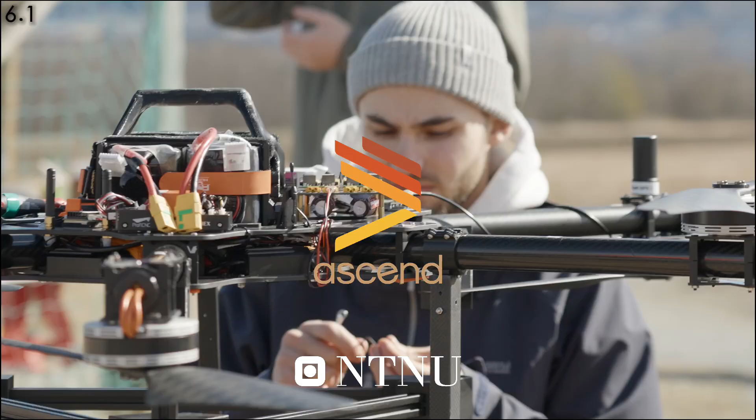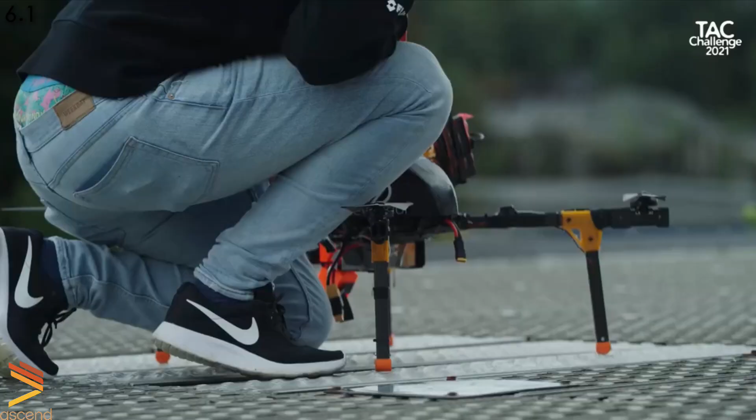We are Ascend NTNU from the Norwegian University of Science and Technology, and since being founded in 2015 we have developed autonomous drone platforms for multiple international competitions. With a proven track record of innovation and dedication, we're now setting our sights on the SUAS competition of 2024.

This year's development team consists of 4 technical groups: hardware, perception, autonomy, and control, 2 non-technical groups, marketing and business, and a board that organizes the whole organization. Our competition team consists of a team captain, safety pilot, backup safety pilot, ground control station operator, backup ground control station operator, and hardware, perception, and autonomy specialists.

Since participating in the previous SUAS competition, it has been the last year's goal of our team to further develop our technology and make a new drone to compete in the 2024 SUAS competition. It has been our main goal to design and build a custom UAV that can solve the specified tasks, introducing a carbon fiber hexacopter named after the sun-chasing god from Norse mythology, Skuld.

The competition requirements were divided among the 4 technical groups, and each group was responsible for analyzing and providing concepts for solutions. Based on the SUAS rule set and different criteria for the various scenarios, we decided on acceptance criteria for the different parts of the challenge and general operational and safety requirements.

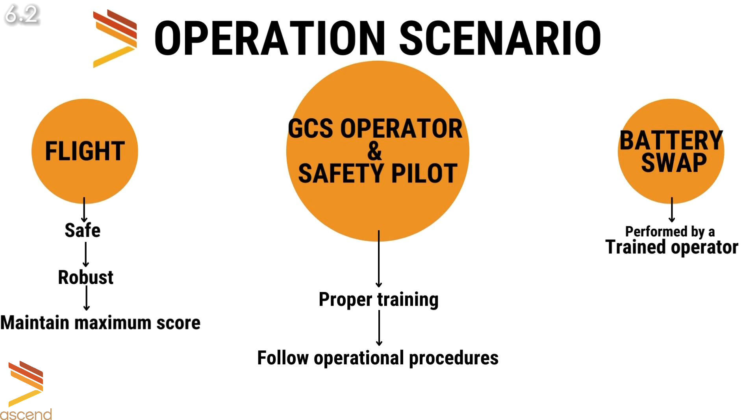Operation scenario. For the autonomous flight scenario, the following must be achieved.

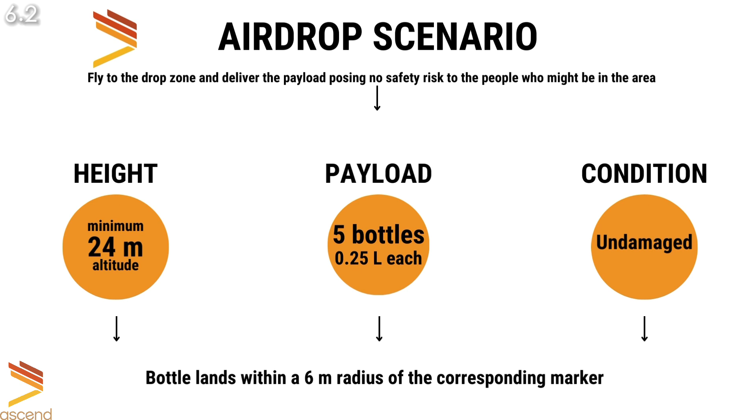For the airdrop scenario, we have arrived at the following requirements. For the ODLC part, we must reliably detect, classify, and localize all standard and emergent objects within the airdrop boundary.

Aircraft avoidance scenario.

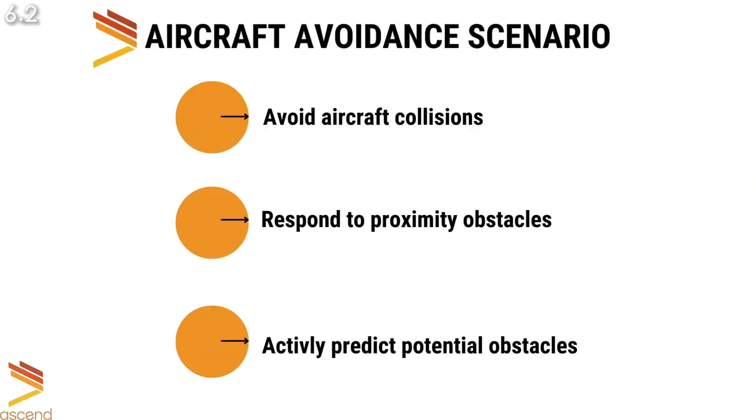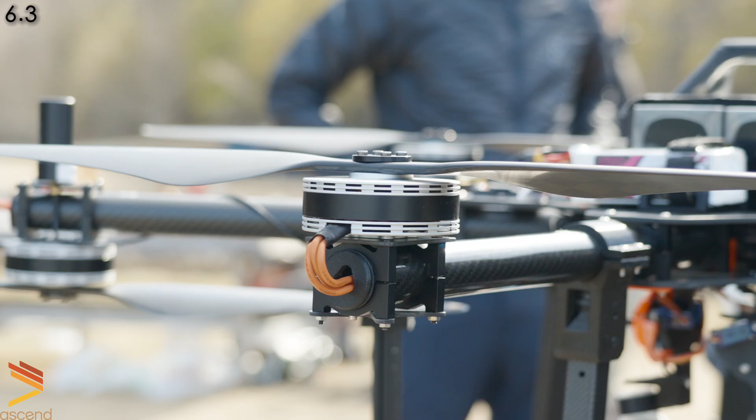Skuld is a UAV hexacopter with its main body built from 2 custom-milled carbon fiber plates connected with aluminum brackets. The battery is located in the middle of the frame as the main battery for propulsion. To power the onboard electronics like the flight computer and sensors, a secondary low-voltage battery is used. Out from the main frame, there are 6 arms with overlapping carbon fiber propellers.

In addition, the UAS consists of different subsystems, such as a custom-built drop-off mechanism for precise payload deployment and a gimbal with high-resolution camera, both located underneath the main frame.

NVIDIA's Jetson Orin NX is the onboard computer that runs the mission code. The flight controller is a Cube Orange running the open-source PX4 flight control software. It has a closed system that is responsible for both low-level control and advanced autonomous path planning, as well as communication to the ground control station. It receives waypoints and commands from the onboard computer to perform the mission.

Additionally, it is connected to a remote ID receiver, 2 radio link modules and a long-range Wi-Fi module, as well as 2 GPS modules with RTK support.

Skuld can be monitored and controlled by a custom-built GCS that delivers a stable and reliable connection to the UAV. It features a high-brightness display and a rugged enclosure and has several hours of battery life.

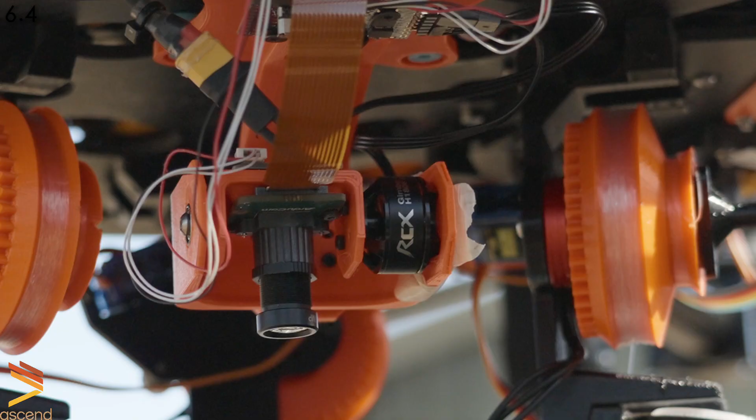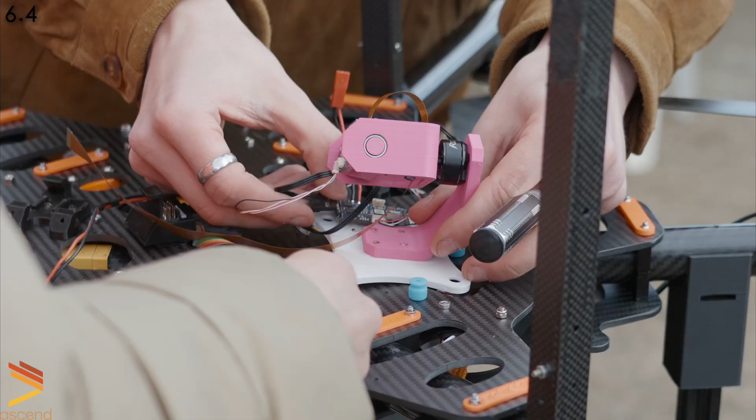The camera used is the Arducam IMX519 with a 25mm fixed focal length lens. It is connected with the MIPI CSI-2. Our focal length gives an average resolution of 200 x 200 pixels for a standard object when flying at 80 feet. The gimbal provides sufficient stabilization to ensure sharp images with minimal motion blur.

The ODLC system consists of 3 main parts: detection, classification, and localization. For detection, we use a YOLO V8 model with pre-trained weights that has been fine-tuned on custom data. Our dataset consists of synthetically generated images for the objects specified in the competition, created using Blender.

The inference runtime is implemented with the NVIDIA TensorRT framework to ensure high performance. In order to ensure high precision on small object detection, we slice each image into smaller parts and run the detection algorithm on each part separately in parallel.

For the classification task, we developed our own network, which we call the ONET. It's heavily based on the well-known UNet in that both use an encoding-decoding pipeline to segment features and have binary masks as output. In our ONET, we use 2 encoders so that we can easily extract the shape and symbol separately. After doing so, we decode to a single output containing 2 binary masks for the shape and symbol color.

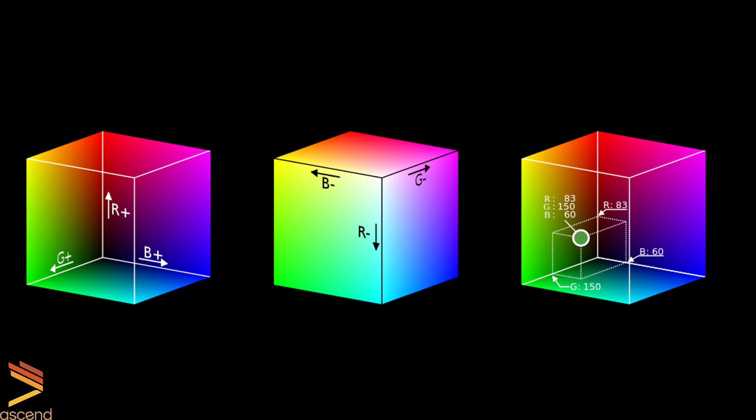Labeling a color simply from its RGB value on an image is a complicated task in itself, so we have a special solution for this as well, based on the fact that the rules provide a set of valid colors. From the binary masks that are the output of the ONET, we can use k-means clustering to extract a representative color. This is then transformed to the CIELAB color space, and we are then able to compute perceptual difference and label a color based on that value.

To achieve successful localization, 2 things are necessary: the drone's position in a local ENU coordinate system and the camera's intrinsic parameters. The former is achieved with our RTK GPS system, while the latter is found using a checkerboard. With these in place, each detection can be projected to a familiar coordinate system.

From all the detections, along with the confidence from our classification, we can create a discrete probability map. In the end, a Gaussian blur is applied to the map so that we can find the optimal drop location.

Deciding on a camera solution involved testing many different combinations of sensor, optics, cable, and mounting. We tested with 4 different cameras, focal lengths between 4 and 50mm, USB and MIPI CSI, with and without shock absorption mounts, and lastly, with and without gimbal. Detection was largely trained and tested on synthetic data generated in Blender.

We verify the system by visually checking that we have few to none false positives and a majority of true positives during test flights and bag data. Classification was mostly tested on hand-labeled images from test flights, and localization was tested by flying over a single or 5 objects where we knew their position in the local coordinate frame, then logging where the localization projects the objects and noting where the water bottle lands.

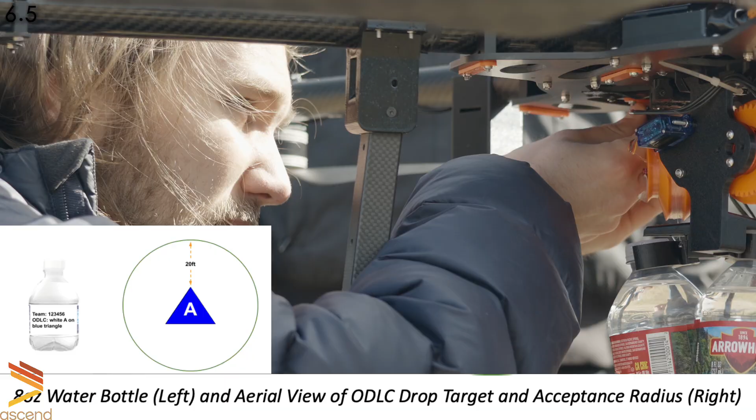The payload includes 5 8-ounce water bottles that must be delivered carefully to the right airdrop boundary. To complete the mission, our team will begin by pre-attaching 2 out of the 5 water bottles, which will be dropped initially at their intended markers. Afterwards, a pit stop will be conducted to reload batteries and attach the last 3 water bottles. This allows Skull to execute the mission with a lighter payload and maximize speed.

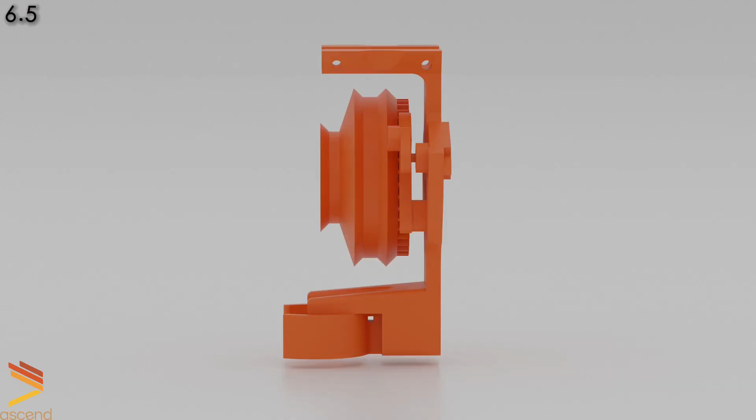The mechanism used to drop the payload consists of a spool of fishing line attached to the bottles with a clip-on mechanism and a shortened BLDC motor acting as an inductive brake. To release the payload, the teeth holding the spools in place are disengaged. When the water bottle touches down on the ground, the fishing line disengages from the spool. This facilitates the separation of the payload in a controlled manner and ensures a careful, safe, and stable delivery.

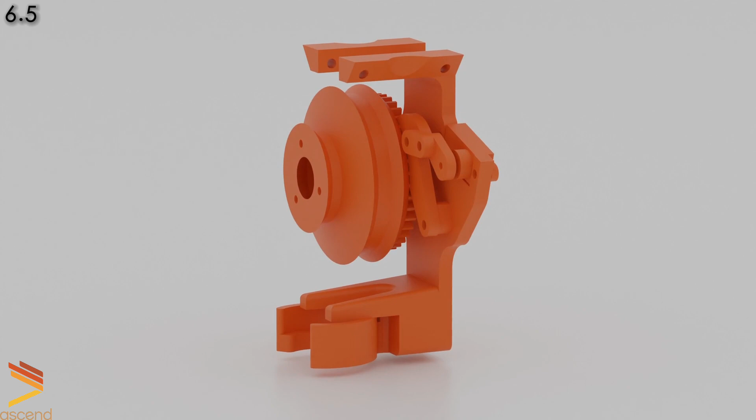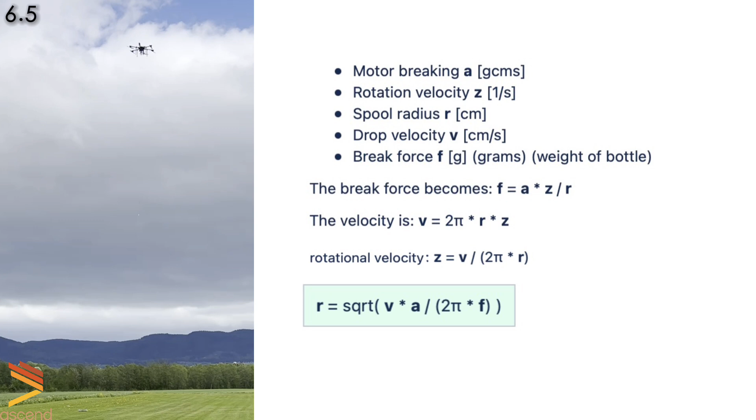To ensure a fast and safe drop, a dual spool with 2 separate diameters is used. The last few meters of the spool uses a smaller diameter to decrease the impact velocity. To determine the optimal drop speed, we tested a spool with a known diameter and calculated the drop speed by tracking the bottle on video. Based on the calculated speed and assuming constant rotational velocity of the motor, we made a spool with 2 diameters. This way, we get the fastest possible drop with a safe impact.

We also use a motorized directional antenna for high bandwidth connections between the ground control station and UAV. It consists of 2 5 GHz long-range Wi-Fi antennas, a dual-band bullet AC radio on the drone, and a directional NanoStation AC mounted on a motorized stand. It uses GPS data to point in the right direction and connects to the UAS onboard computer. As our main telemetry link, the onboard computer routes MAVLink messages from the flight controller through this communication link to the ground, giving us a reliable, long-range connection to the UAV.

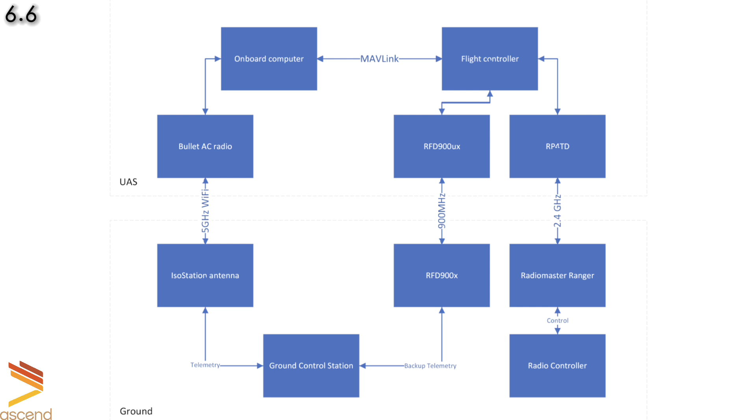This is a visualization of our communication subsystem. Here is the labeled diagram of our UAV Skøll with its subsystems.

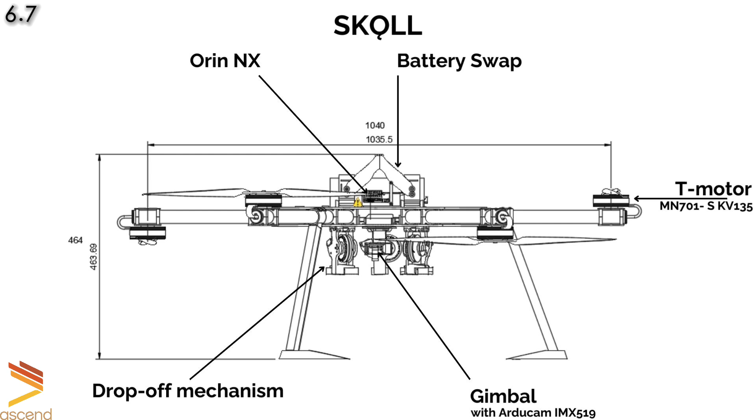The airframe is constructed from 2 CNC milled carbon fiber plates. The arms of the frame are made out of carbon fiber tubes. Precision drill holes were made into the tubes using a manual milling machine.

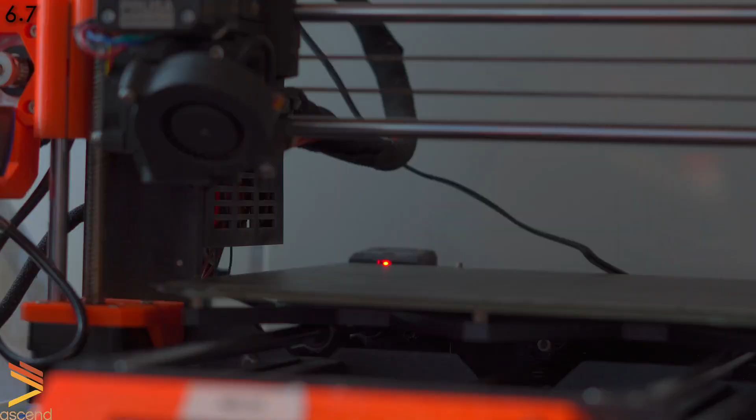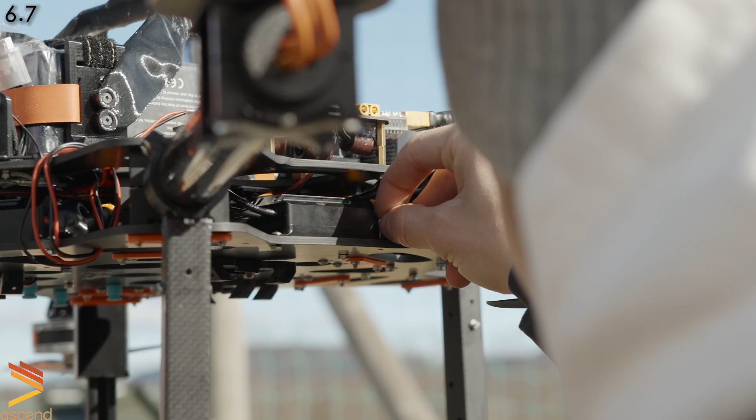Most component mounts are 3D printed in PETG, including the drop mechanism. A custom connector for the arms has been developed for easy disassembling of the drone. The electronics for the drone are placed for effective cable routing and easy dismounting. In between the carbon fiber plates, we have the more permanent components, like the ESC and power distribution board for the high voltage side. On top of the drone, we have the smaller electronics mounted for easy access and troubleshooting.

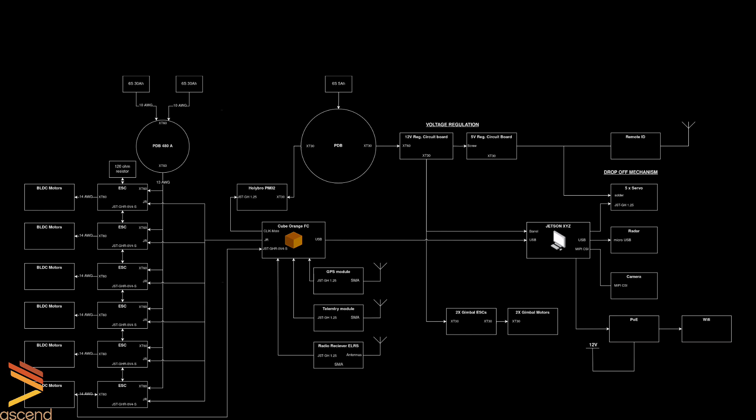We designed our own circuit board for the low voltage side to fit our needs. It includes 2 buck converters to have both 5 volt and 12 volt rails. To ensure our onboard computer and other electronics don't need rebooting during the main battery swap, the 2 electrical systems are isolated from each other and use separate batteries.

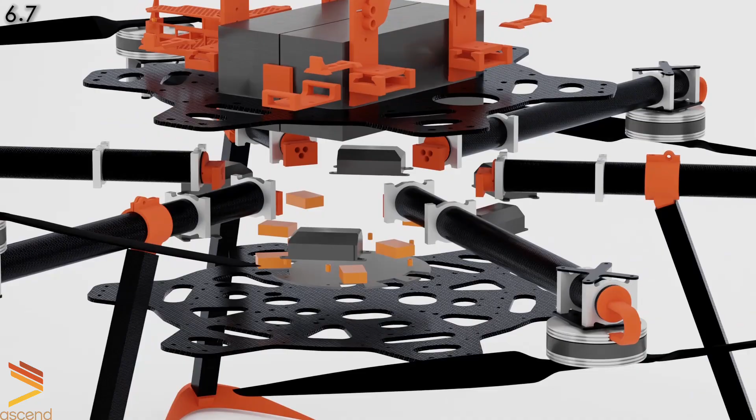The drone uses an overlapping propeller design where every other propeller is mounted upside down. The overlap is around 13%, making for a more compact design, while still being able to fly well and with good energy efficiency.

Once Skøll was deemed flight ready, we had to do an initial stability setup. This was done by tuning the basic PID controllers in the autopilot for altitude and position, and continued by tuning the trajectory parameters. Once we had a satisfactory tune, all the other tests could be performed, and we show the results here. The autopilot system used on Skøll relies on the PX4 framework running on the Cube Orange.

The Cube communicates with the autonomous systems running on the onboard computer via the MAVLink protocol. The PX4 autopilot system is capable of managing diverse flight scenarios, including tasks such as waypoint navigation, modified speed mode, and path rerouting. Additionally, we have our own autonomous system doing path planning, obstacle avoidance, and mission execution.

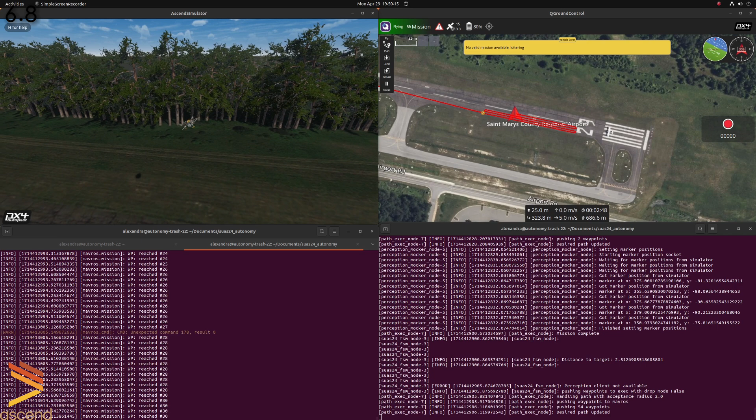The autonomous system runs on several ROS nodes, all in communication with a central deciding ROS node. The central ROS node takes decisions, while the other nodes perform services for the central deciding unit. This central node is designed as a push-down automaton, a finite state machine with memory. The finite state machine has knowledge of the mission and is able to lead the drone through both ideal and unforeseen circumstances via a series of fail-safes and checks.

In the preparation phase, mission coordinates are pushed to the onboard computer, where they are integrated into 3 distinct mission files: ingress waypoints, search boundary, and geofence border. When the ground control station deems that it is ready for the mission, it sets the drone into mission mode, and the onboard autonomous system handles all mission pushing, navigation and path planning autonomously.

During search, the autonomous system monitors the drone's position and generates a heat map of where the drone has scanned, ensuring that the drone scans the entire search area.

During the entire mission, an object avoidance module is continuously monitoring all remote ID messages received via Wi-Fi and Bluetooth, and if it predicts that its path is intersecting with another drone, it replans the path and pushes a new mission to the flight computer.

The autopilot has undergone thorough testing both by setting waypoints manually and automatically. During testing, we switched seamlessly between different PX4 autopilot modes and completed whole mission runs autonomously. Adding to this, we have also tested the autopilot continuously throughout the year via our own simulator, custom built with Unity 3D game engine.

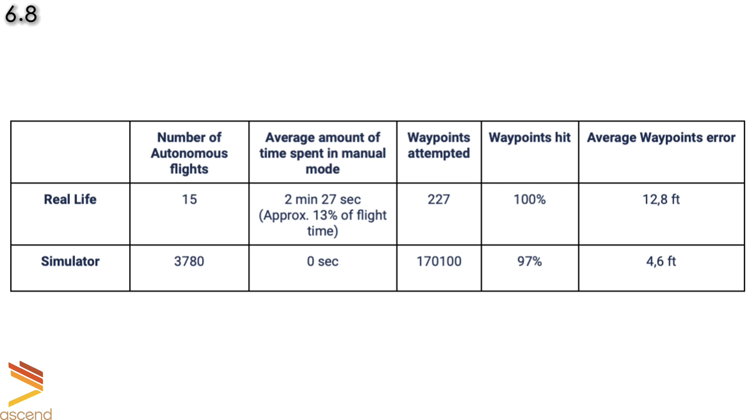On the Orin NX onboard computer, we have a ROS node continuously checking the received remote ID messages to detect whether there are any drones on an intersecting path with Skuld. If another competitor drone is about to interfere with Skuld's current path, the ROS node runs an RRT star search algorithm between the waypoints where the other drone intersects Skuld's path.

The algorithm aims to find the shortest path between the waypoints while avoiding the obstacle. If a path is found, the node runs a Bezier curve path smoothing algorithm on the path to smooth the flight and then overrides Skuld's current planned path with a new one, avoiding the obstacle.

If the algorithm deems it impossible to navigate between the 2 relevant points, which may happen if a drone is sitting on top of the waypoint we aim for, it sends an error message back to the main autonomous system, which handles it according to which mission component it is in.

If the drone is in the search zone, it skips the waypoint. If it is in the ingress path, it waits for X seconds before pushing the same path again. If it is attempting to drop a payload, it selects another payload to drop, and if not, it waits for the drop point to become available.

Due to hardware limitations of remote ID, we have implemented a fail-safe for if the drone finds itself in a situation where it is within the desired avoidance radius of another drone. If so, the algorithm moves the drone radially outward in order to avoid it.

Inside the drop zone, we have implemented an extra algorithm that checks the position of other drones compared to the position of the detected markers. If there are drones near the markers, the likelihood of the drone deciding to go to that marker drops. This is to keep distance from other drones to reduce the chances of any potentially dangerous scenarios.

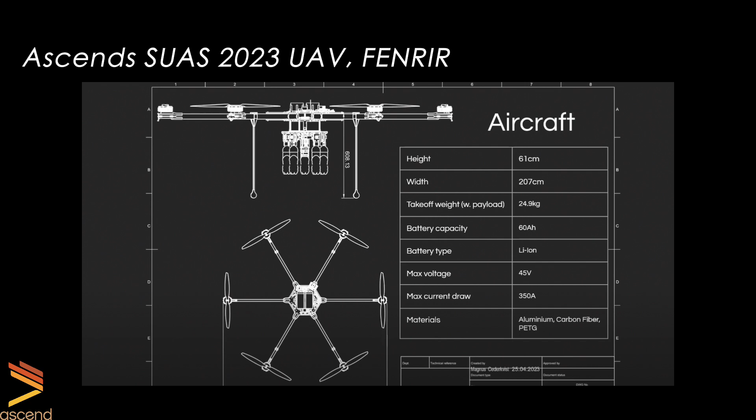Both on the hardware and software sides, when it comes to the actual physical drone, the alternatives brought up were all discussed in light of us wanting to decrease size and weight and simply make the drone easier to work with. As an example, on the mechanical side, we ended up with overlapping propellers to make the design more compact.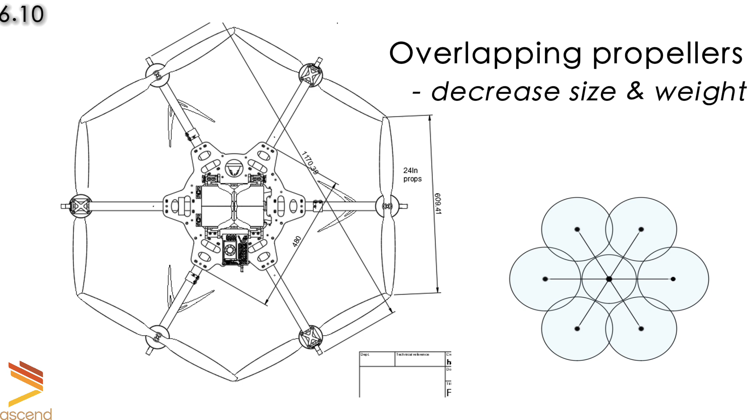We did initial testing on a test stand with overlapping propellers. When we saw promising results of that, we set up our old drone with overlapping propellers to get more realistic data. A big decision that affected both mechanical and electrical was whether we wanted to make a pit stop to swap batteries or if we planned to do everything in a single flight.

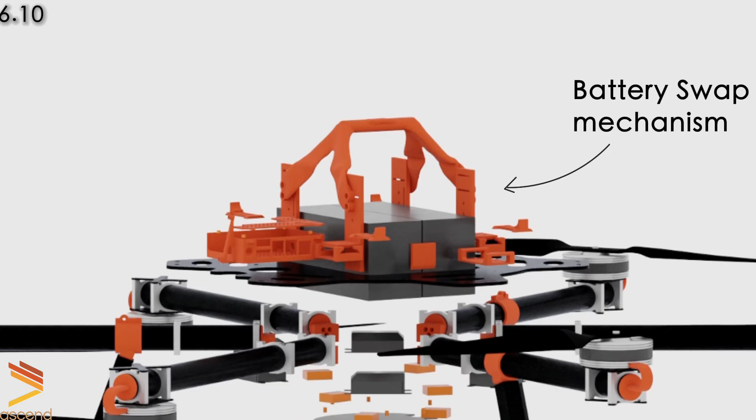We ended up going for a pit stop solution, since our designs for swapping systems helped prevent human error, which is the main drawback. Had we not gone for this, we would have needed bigger batteries and therefore a heavier and more cumbersome drone. For the avoidance algorithm, the choice was between RRT star and A star.

Despite A star guaranteeing optimality of the path, we found that RRT star's robustness, situational flexibility, and it outperforming A star in computational complexity made it a better choice.

We concluded that finite state machines suit our needs better than our second choice, namely behavior trees. We found that FSMs were the easiest theoretical framework to work with because the simplicity of FSMs reflect that of the mission structure.

As this year's mission is alike last year's in many ways, a lot of our safety procedures are heavily inspired by last year's. All our members are made aware that we are working on a very big drone that flies with great speeds and that each step should be taken very cautiously.

Our control and hardware groups are the ones doing the work on the physical systems on the drone. All members in these groups go through courses and training to learn how to use tools and machinery in a safe way, and are obligated to ensure that the motors on the drone are powered off when working.

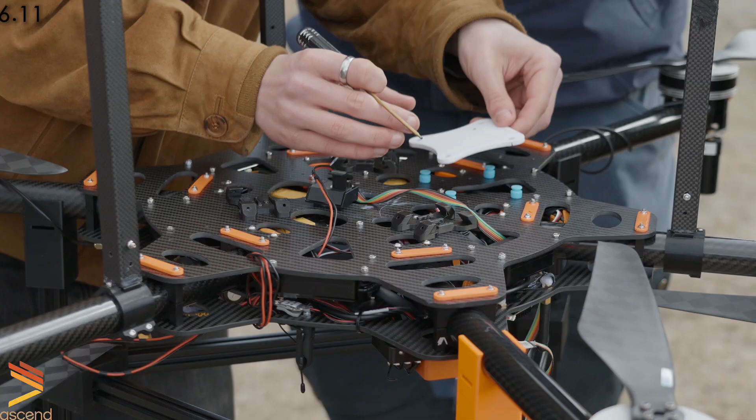Other than constant awareness of working with dangerous equipment, we have more concrete safety measures both while developing and testing the drone. When testing, everything we do is said out loud, and we ensure that no one is in the immediate vicinity of the drone as it's being armed.

Our flights are all done in an airfield with well-defined boundaries and safety nets in place. When it comes to in-flight operations, the hexacopter design of the drone allows for motor redundancy, meaning that if a motor were to fail, it can still manage to have a safe landing and not crash uncontrollably.

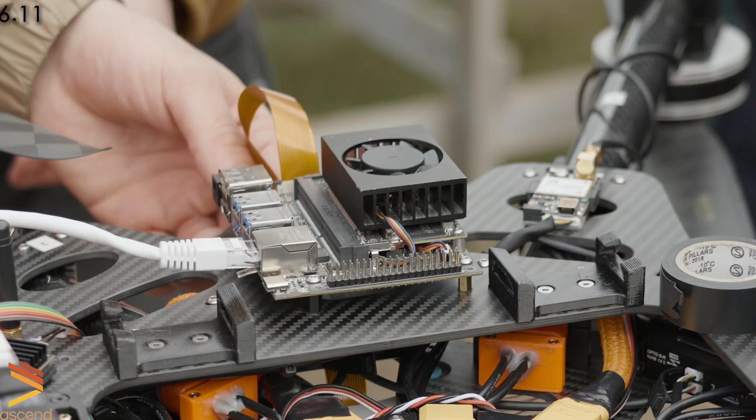All our pilots have drone flying licenses and go through a lot of flying with bigger and smaller drones, as well as in simulators, so as to ensure that they are competent enough to take over should anything happen.

Despite this, should there be an emergency, the drone and controller are equipped with an independent kill switch that cuts all power to all motors.

When it comes to the drop-off systems, the release speed is tested so that it never gets to the point where it could be dangerous to anyone in the vicinity.

When we're content with how our systems work together and the integration in our in-house simulator, we go to Udduvoll, a model airplane airfield. We have predefined packing checklists for all our tests that have to be completely filled out before we leave. Once everything is set up on site, we don't immediately start flying a mission.

Rather, we test that the communication with the drone is up and running, ensure that we have good GPS positioning and heading, after which we do a simple test to ensure that all propellers are spinning. When all these basics are in place, the actual testing can begin.

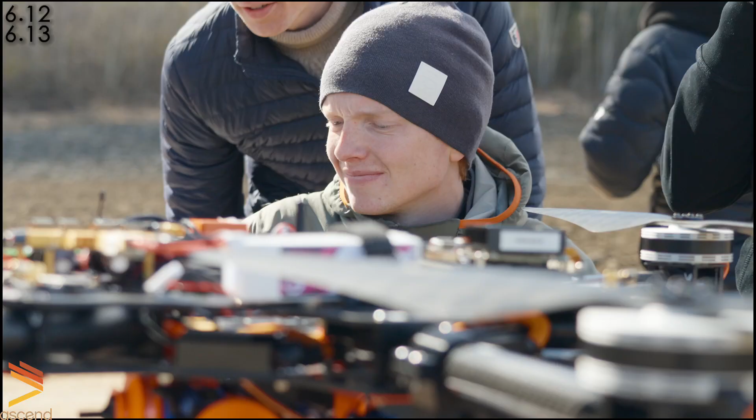The mission is defined in QGroundControl on our ground control station, and our operator is constantly monitoring the telemetry data. The pilot is prepared to take over at all times and follows the drone's movements closely. During testing, the data from the drone is logged for off-site analysis to see what can be improved for the next runs.

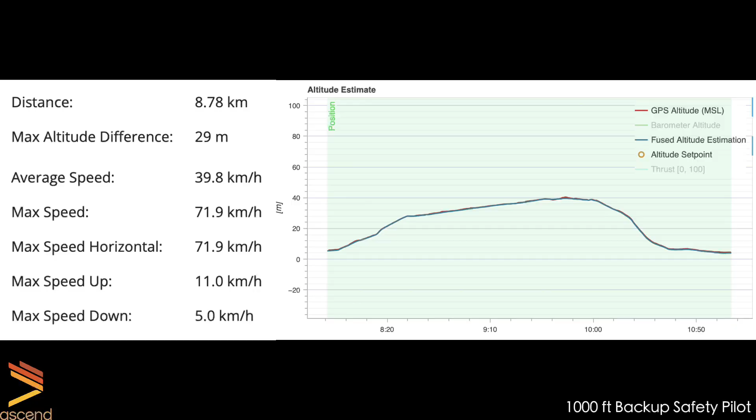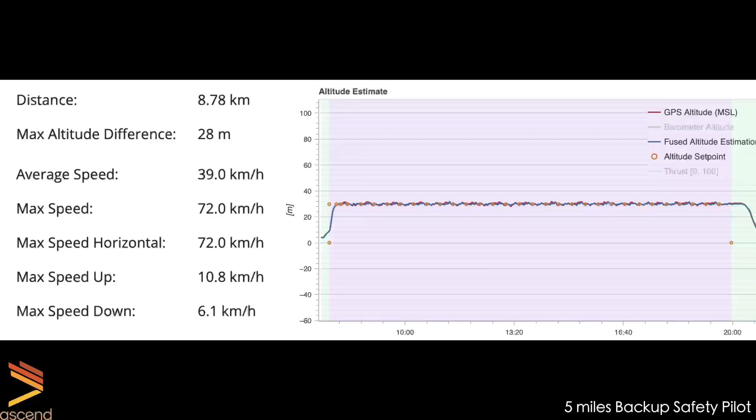In this video, we have described our latest UAV, Skuld, and its ground control station for mission control. We have introduced our team of 2024 and our competition team. We have covered the requirements derived from the rules and targets of the competition and presented our solutions for handling these different challenges. This includes dozens of technical solutions and essential operational procedures and principles for ensuring that we fly safely while hitting our performance targets.

Then importantly, we have gathered the numbers and necessary documentation and statistics to present what our UAV is capable of. We have shown that it flies safely, as demonstrated by a proof of safe flight and relevant performance metrics. We are very proud of our achievement, and it has been a great learning experience to create such complex systems.

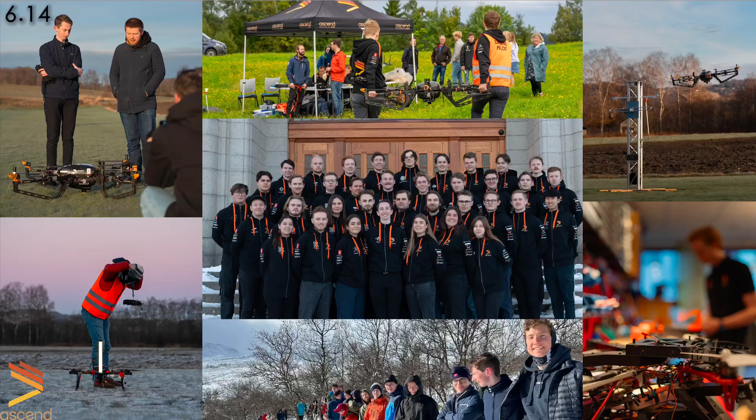We have worked several hours, collaborated across different disciplines in our internal groups, and together grown as a team. We look forward to seeing the solutions other teams have come up with and to compete against them this summer. We are Ascend NTNU. Thank you for your attention.